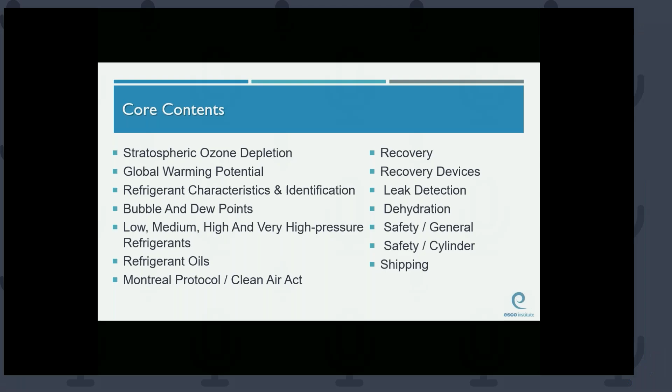We can see on screen here the different areas that are used to generate questions for the exam. We're going to try and touch on as many of these as possible. As I go through this, if questions arise, please submit them using the question feature and we'll try to address them at the end. As we go through the PowerPoint presentation, you'll see areas highlighted in red. These should be focal points of the presentation, where there are questions and or answers derived from this statement, concept, or fact. So pay particular attention to those.

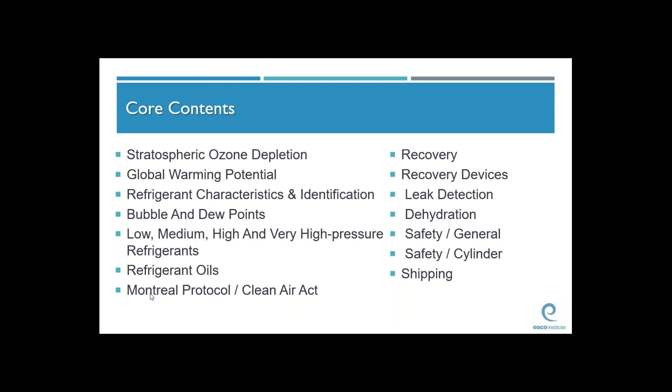We're going to get started with a brief description of the ozone. The ozone layer is what protects the Earth from the sun's harmful ultraviolet rays. The image shown here is from 2004, and it shows the hole, which is centered mostly over Antarctica.

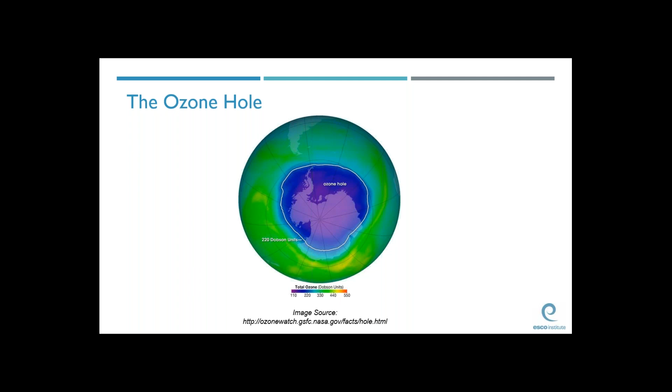The ozone layer is mainly located in the portion of the stratosphere, typically starting at about 7 miles up and extending to about 30 miles up. However, the height and thickness can vary seasonally and geographically.

Our biggest concern is the depletion of the ozone layer. Ozone depletion potential measures the ability of a substance to destroy stratospheric ozone. Scientific evidence points to chlorine in CFC and HCFC refrigerants as the primary cause of this depletion.

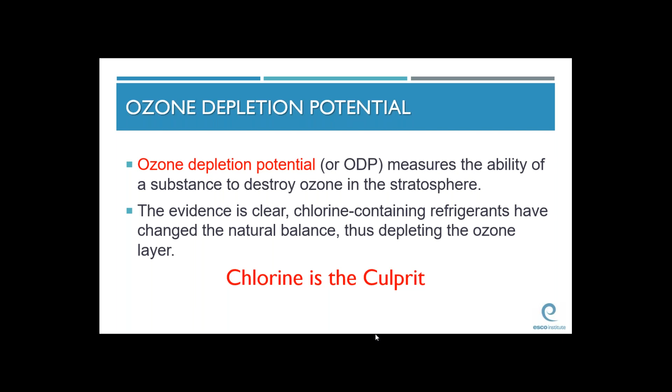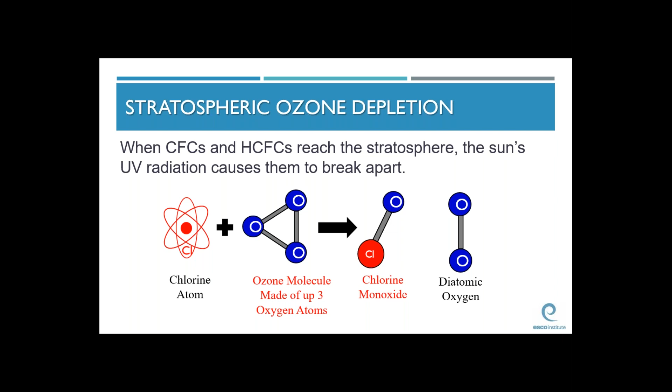The chlorine from CFCs and HCFCs will reach the stratosphere. It'll chemically react with an ozone molecule, which is O3, and break it down into chlorine monoxide and O2. Chlorine monoxide will release the oxygen atom and continue to attack other ozone molecules, breaking them down. Due to its average lifespan of 120 years, a single chlorine atom can destroy up to 100,000 ozone molecules.

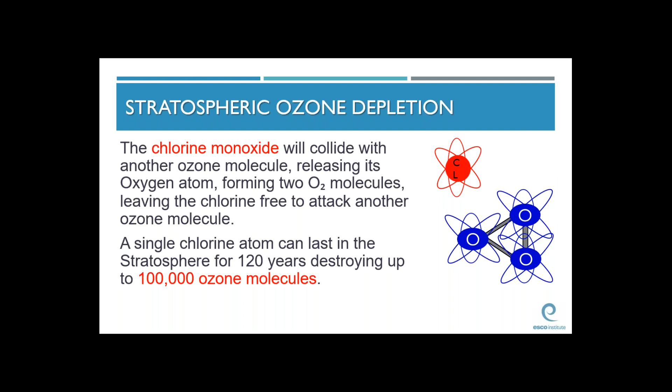So how do we know that it's chlorine from refrigerants and not naturally occurring chlorine that's destroying the ozone? Naturally occurring chlorine will dissolve in water and rain out of the atmosphere. Chlorine from CFCs and HCFCs will neither dissolve in water nor break down into compounds that dissolve in water.

As you can see, the slides highlighted in red there, so these are focal points for these particular slides.

Another environmental concern is the global warming potential, or GWP. GWP was established to compare the global warming impacts of different gases over a period of time. Carbon dioxide, which is CO2, has a GWP of 1 and is used as a baseline gas for these comparisons.

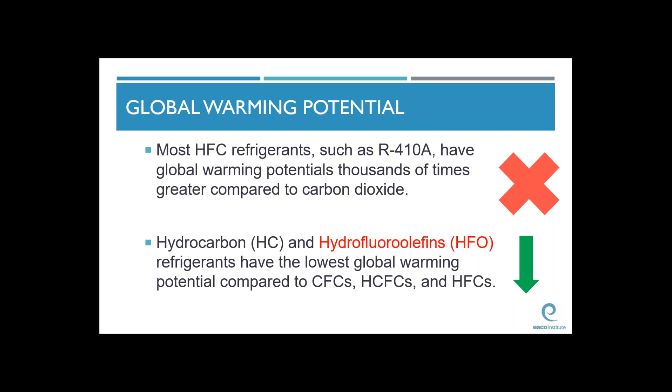Most HFCs currently in use have extremely high GWPs, in the thousands. Hydrocarbons and hydrofluoroolefins, or HFOs, currently have the lowest GWPs.

Refrigerant characteristics: ASHRAE Standard 34 groups refrigerants based on their flammability and their toxicity. Toxicity is represented by a letter, either A or B, and flammability is represented by a number, 1, 2, or 3. The 2 group has been divided into 2 more groups, the 2 and the 2L. The 2 has a low flammability, and 2Ls are slightly or mildly flammable.

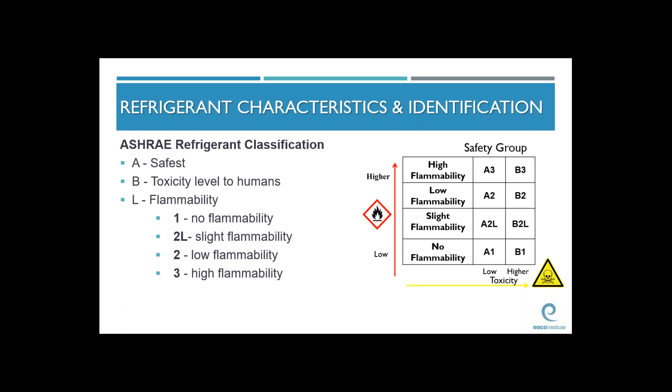We're going to briefly go over the different types of refrigerants and some of their characteristics. CFCs contain chlorine, fluorine, and carbon and have the highest ozone depletion potential of the refrigerants being used.

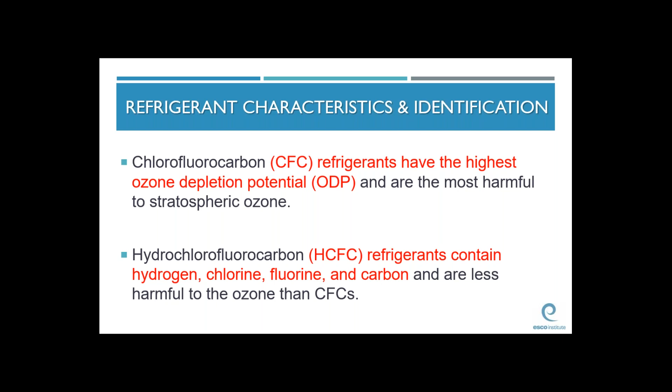HCFCs contain hydrogen, chlorine, fluorine, and carbon. They have less chlorine and more hydrogen than CFCs, but still contribute to ozone depletion.

HFCs contain hydrogen, fluorine, and carbon. They have an ozone depletion potential of 0. However, they typically have very high GWP, or global warming potential.

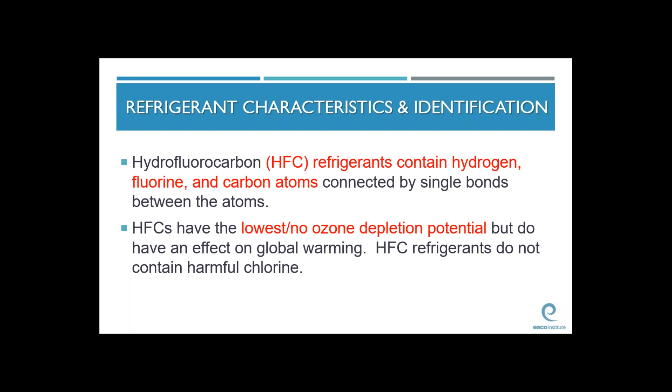Some examples of the refrigerants we just mentioned: CFCs are R11 and R12, HCFCs are R22 and R123, and HFCs are R134A, R410A, R404A, and R407C.

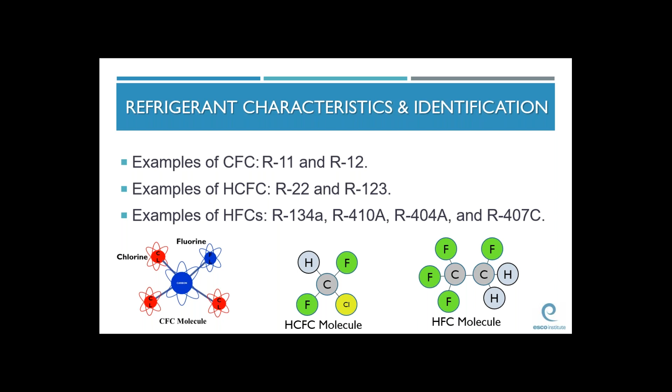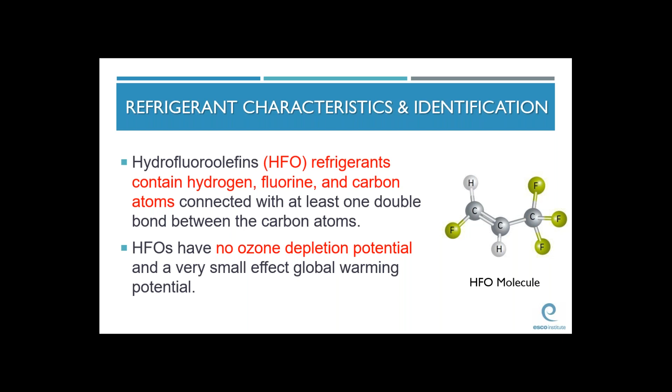HFOs contain, just like HFCs, hydrogen, fluorine, and carbon. However, HFOs have at least one double bond between carbon atoms, which makes them different from HFCs. They have a 0 ozone depletion potential and a very low global warming potential.

Most HFOs are mildly flammable and as such are classified as A2Ls. They contain fluorine, making them less flammable than hydrocarbons.

Currently, HFO 1234YF is being used in low-pressure chillers.

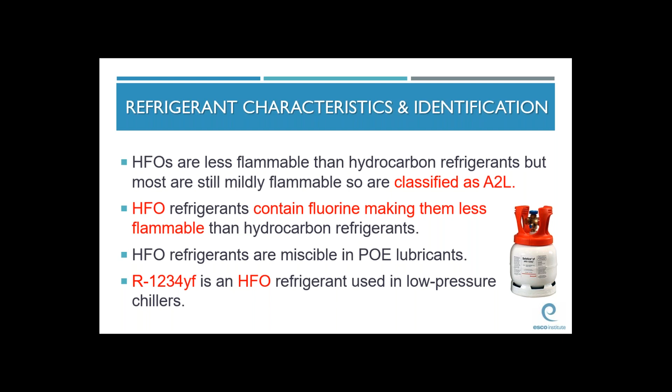Hydrocarbons contain hydrogen and carbon and are the least damaging of all refrigerants to the environment. They have an ozone depletion potential of 0 and a very low GWP, usually 10 or less.

Isobutane, which is R600A, and propane, which is R290, are examples of hydrocarbons currently in use in HVACR equipment. Now, as a point of emphasis here, the propane that's used as a refrigerant is not the same propane that's used for the grill. It contains impurities, so the propane that is used as refrigerant, R290, has been cleaned, filtered, and made refrigerant grade quality.

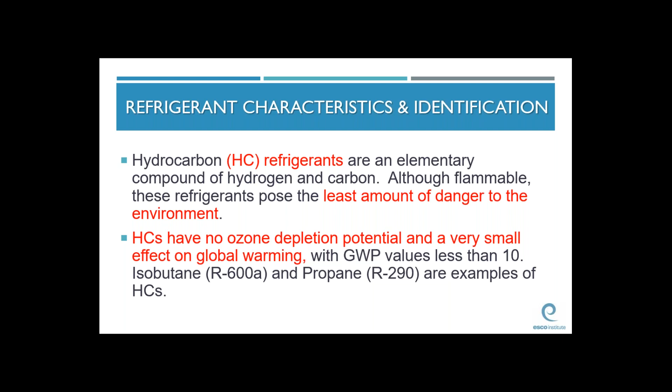Azeotropic refrigerant blends contain 2 or more refrigerants that, when blended together, create a new refrigerant that behaves like a single component refrigerant. They're numbered in the 500 series.

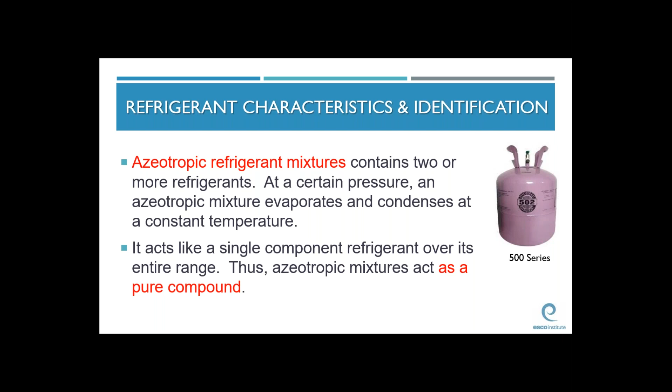Zeotropic and near azeotropic refrigerant blends contain 2 or more refrigerants that have different boiling and condensing points. If they're 2-part, they're labeled as binary; 3-part labeled as ternary. They're numbered in the 400 series.

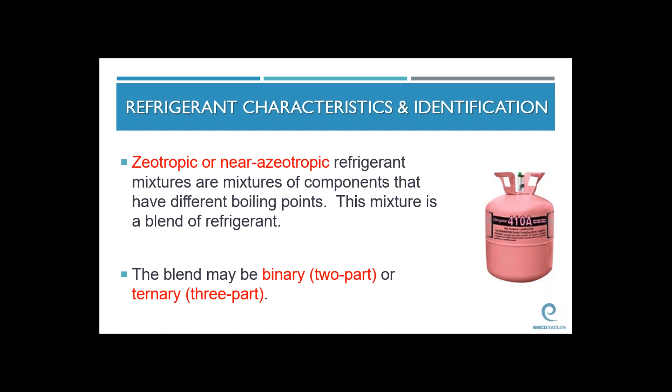Zeotropes and near azeotropes can fractionate, or separate into their original refrigerant components. This can cause their composition to change when leaks are present. Zeotropes and near azeotropic refrigerant mixtures should be charged as a liquid to avoid fractionation.

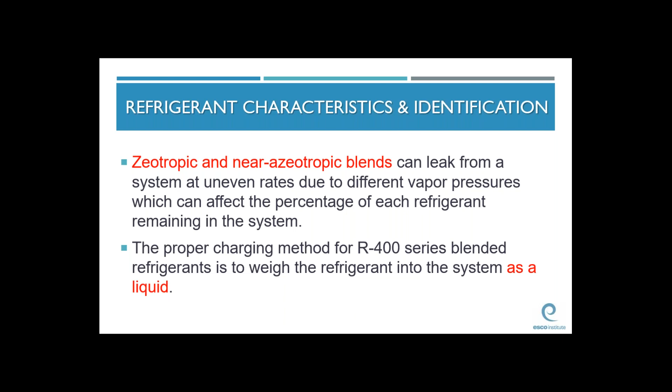Temperature glide is a term used to describe when a blend has a range of boiling or condensing points rather than a single boiling or condensing point. Temperature glide can range from a few tenths of a degree up to 12 degrees or more. For example, R410A has a temperature glide of 0.3 degrees.

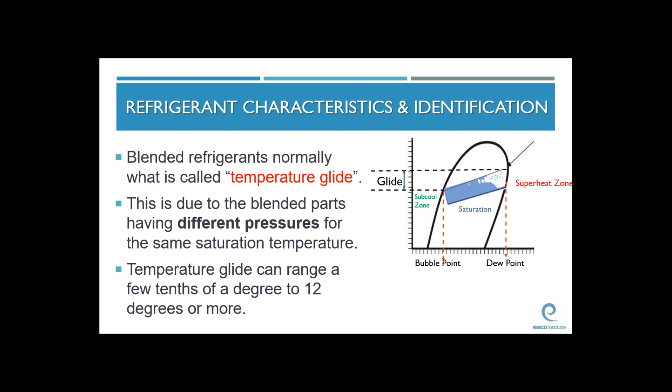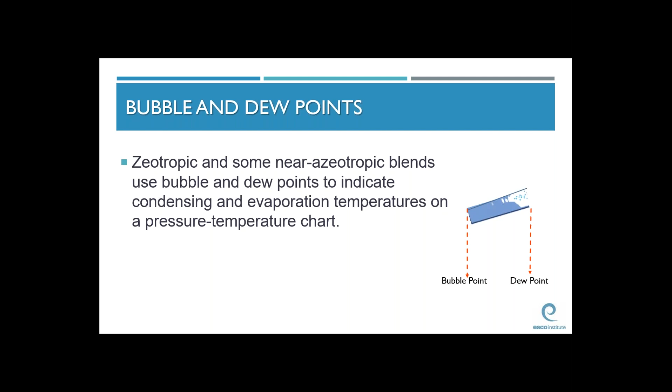Charging refrigerants that have temperature glide has been an issue for some technicians and students to grasp. Instead of using a single temperature pressure chart, we have to use what are called bubble and dew points. Charging blended refrigerants that can fractionate and have temperature glide is done using these points, the bubble and the dew point.

As an example, we have a temperature pressure chart that shows 2 columns under 407C. The liquid phase is used for charging with subcooling, the bubble point, and the vapor phase is used for superheating, or the dew point. Bubble point is used when charging by condenser subcooling. Dew point is used for charging with superheat.

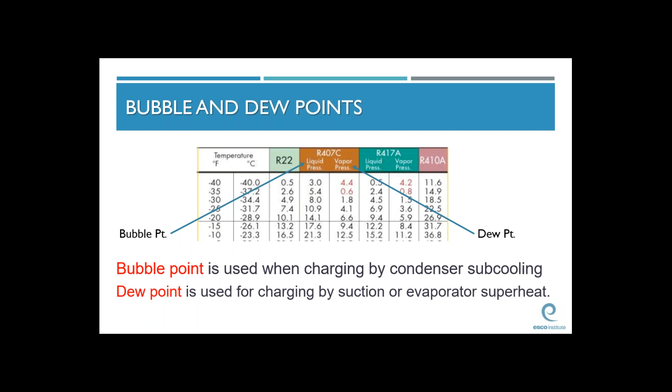For updated leak rate, service, and recovery levels, the EPA now uses 4 pressure ranges based on the refrigerant's liquid phase pressure at a condensing temperature of 104 degrees. These are the pressure classifications of the refrigerants. Previously, it used to just be low, high, and very high. They've added a medium class for refrigerants. So now we have low, medium, high, and very high pressure refrigerants.

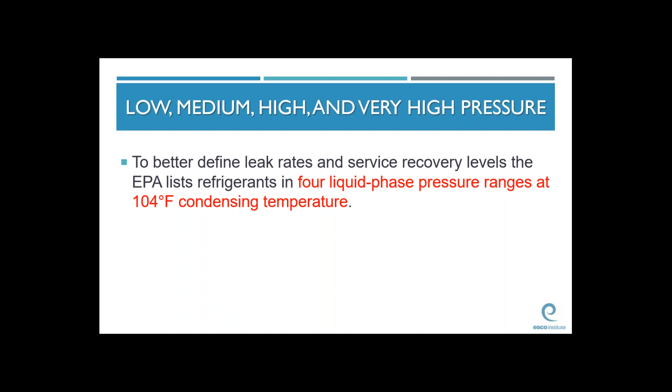As an example, low pressure refrigerants would be CFC 11, HCFC 123, and HFO 1233ZD. Medium pressure refrigerants would be CFC 12, HFC 134A, HC 600, and HFOs 1234YF and 1234ZE. High pressure refrigerants would be HCFC 22, HFC 404A, and HFC 410A. Very high pressure would be R744, which is CO2.

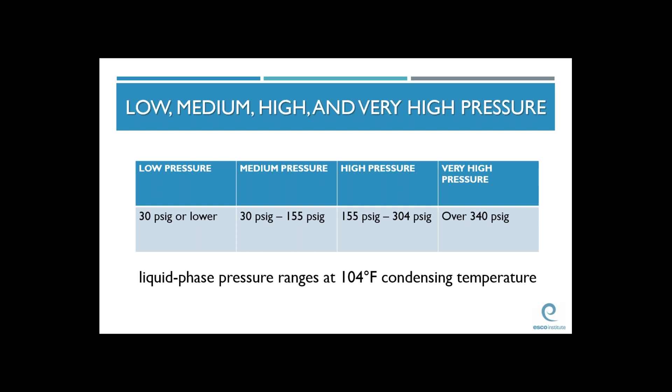We're going to move into refrigerant oils. HCFC blends use alkylbenzene oil, which is a synthetic oil. HFCs typically use polyolester or POE oil, which is also a synthetic oil. POE oils shouldn't be mixed with any other oils.

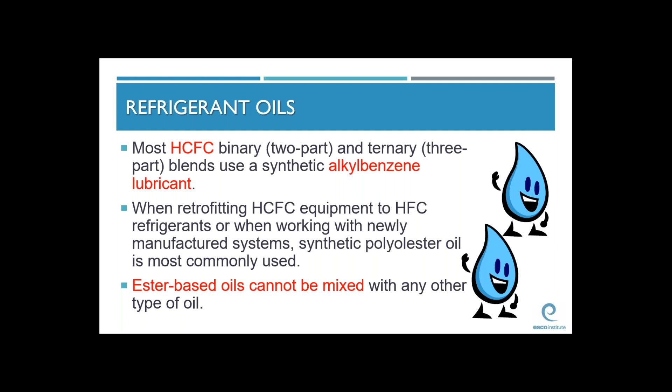When performing a retrofit from an HCFC to an HFC blend, most manufacturers will recommend that the oil be changed to the POE oil. It should also be noted that POE oil is hygroscopic, which means it readily absorbs moisture. So it should be limited to exposure to the atmosphere to 15 minutes or less.

We're now going to dive into the Montreal Protocol and the Clean Air Act and some of their regulations and requirements. The Montreal Protocol was a treaty signed by many nations that was meant to address ozone depleting substances, and the United States was a signatory to that.

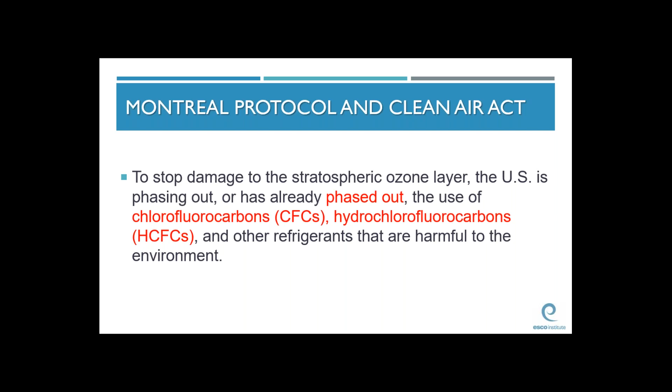To stop the stratospheric ozone depletion, the United States has phased out or is in the process of phasing out CFCs and HCFCs.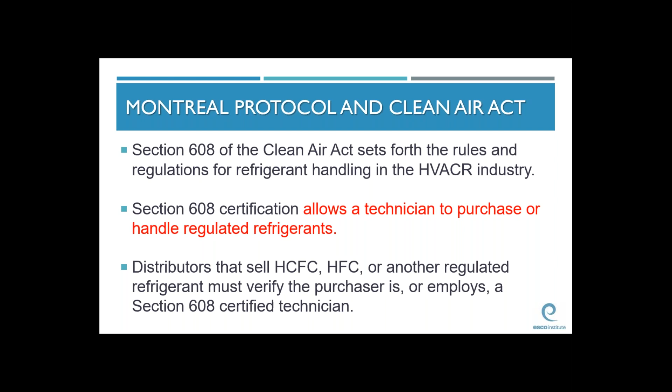It is Section 608 of the Clean Air Act that establishes regulations for the HVACR industry. It is a Section 608 certification that a technician is required to have to purchase these regulated refrigerants. Distributors that sell regulated refrigerants must verify that anyone purchasing the refrigerant employs or possesses a 608 certification.

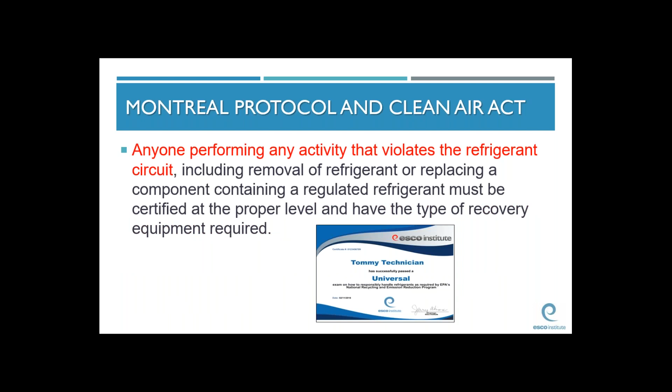Anyone performing an activity that violates the refrigerant circuit, meaning by accessing or opening the refrigerant circuit, is required to have a certification. A certification is not needed by persons that are servicing external components to the refrigerant circuit, such as electrical circuits.

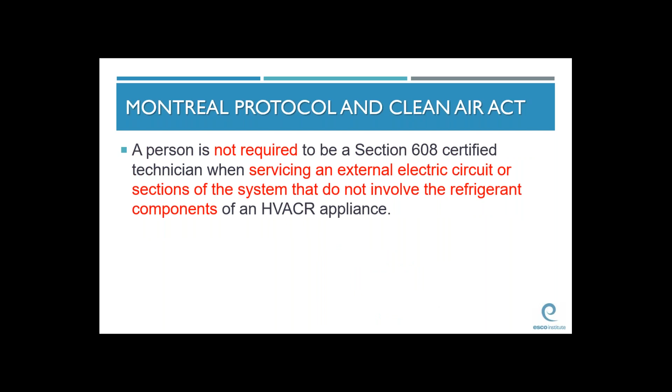Listed in the Clean Air Act are a set of refrigerants that are exempt from the prohibition on venting, such as ammonia, CO2, and some of the naturals like R290, which is propane, or isobutane 600A. Also, when a small amount of refrigerant is used as a trace gas for leak detection, it also is exempt from the prohibition on venting.

The EPA does not consider this a refrigerant when it is used as a trace gas, and by definition, it's a few ounces.

As of 2017, the fine stands at $44,539 per day per violation for a violation of the Clean Air Act.

If the EPA were to change regulations in the future after a technician were to become certified, it is the technician's responsibility to both learn and comply with any future changes.

State and local governments may pass laws that are stricter than what the Clean Air Act calls for.

In the United States, coming up in 2020, our HCFC-22 and HCFC-142B will be phased out. The rest of the HCFCs will be phased out in 2030. So supplies for those types of systems, the refrigerant in those systems, will come from recovery and reclamation efforts of technicians.

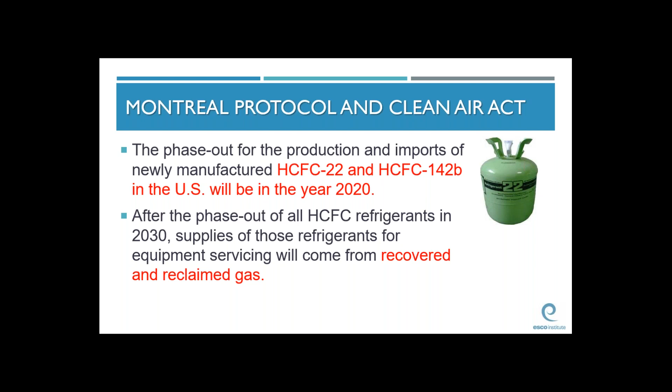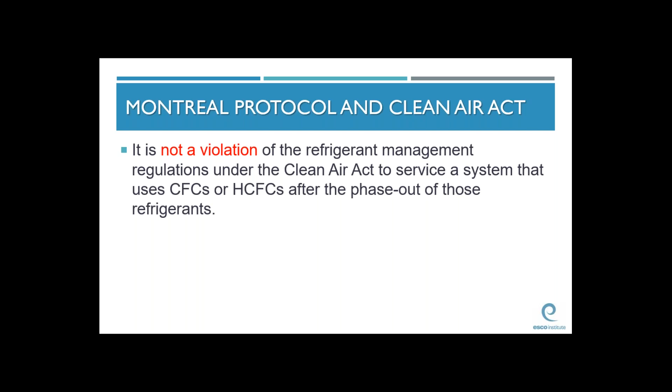It is not a violation to continue to service these systems. If a system runs on a refrigerant that has been phased out, as long as there's a supply of refrigerant in stock or a replacement refrigerant for that system, it is not a violation to service those systems.

Refrigerant that has been returned to be reclaimed must meet AHRI standard 700 for purity before it can be resold. A refrigerant that has been recovered but not reclaimed can only be charged into the system from which it came, or into a system with the same owner. Used refrigerant that does not meet AHRI standard 700 cannot change ownership without first being reclaimed.

Recovery machines that are used to recover regulated refrigerants must meet EPA standards. AHRI standard 740 is the standard for recovery equipment testing.

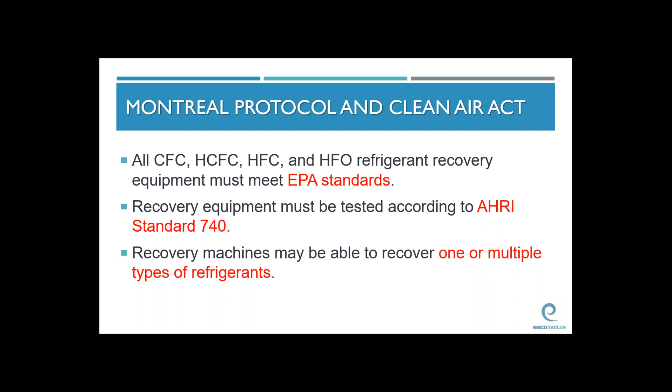There is no requirement that a recovery machine must be able to handle more than one refrigerant. It must only be able to handle one refrigerant. It can handle 1, 2, 3, 4, but there's no requirement that it can handle more than one.

Sealed systems, package systems that do not have service valves, must be equipped with some sort of process stub or service aperture that's used to access the system using a piercing type valve. These piercing valves are temporary and should be removed and replaced with a permanent valve when any repairs are completed.

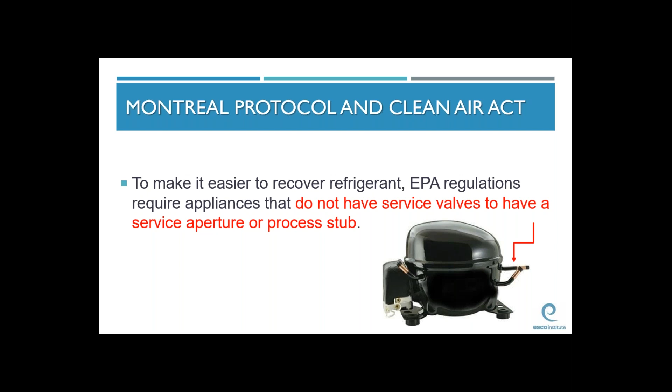When disposing of appliances with 5 to 50 pounds, the EPA does not require the technician to record the model and serial number. However, records must be kept indicating the type of refrigerant recovered, the quantity of refrigerant by type, the quantity recovered from appliances that were disposed of in each calendar month, and the quantity of refrigerant by type sent for reclamation and/or destruction.

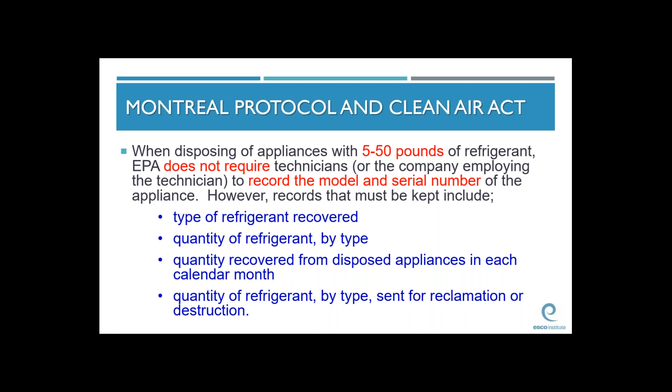It's the EPA that can exempt refrigerants from venting, not companies or technicians. They will determine which refrigerants don't have an environmental threat and list them under the exempt section of Section 608. Some of these exempt refrigerants are your natural CO2, and some hydrocarbons such as R-290 and R-600A.

It is still lawful to service existing R-22 systems using the existing supplies of R-22. It is not legal to top off R-22 with another refrigerant, such as 410A or any of the EPA-approved replacements for R-22. Topping off a refrigerant will cause mixed refrigerants, which may be impossible to reclaim and may cause damage to the system.

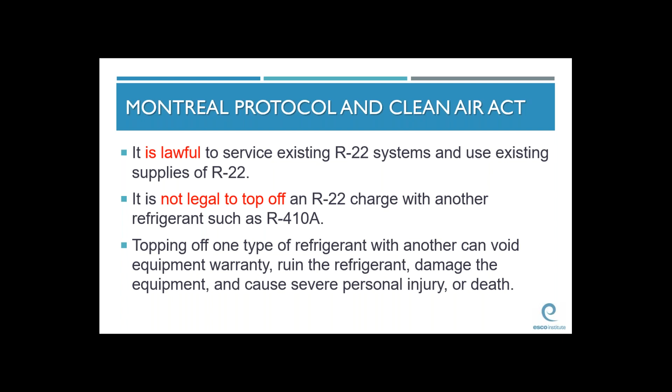Refrigerant cylinders are disposable cylinders. Before they are disposed of, the pressure should be reduced to 0 by recovering the refrigerant and then rendering the cylinder useless. There's a little knockout that's punched out, and typically AHRI recommends that you write empty on the cylinder. The metal should be recycled when applicable.

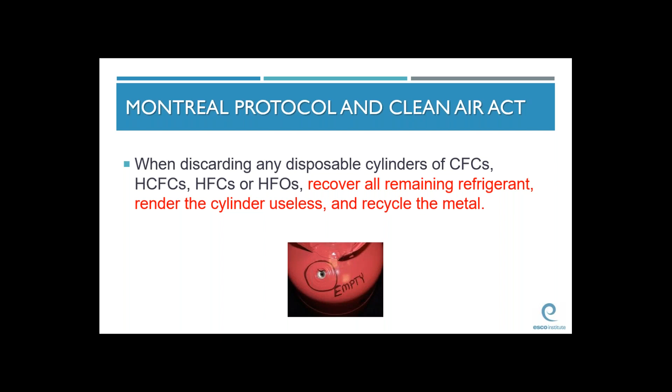It is the final person in the disposal chain that is responsible for ensuring that any regulated refrigerant has been removed from appliances before they are disposed of.

A violation of the Clean Air Act would consist of a knowing release of any regulated refrigerant during the service, maintenance, repair, or disposal of appliances. Added to that, we add vandalism and theft. Cutting the lines when the unit is stolen is a violation of the Clean Air Act.

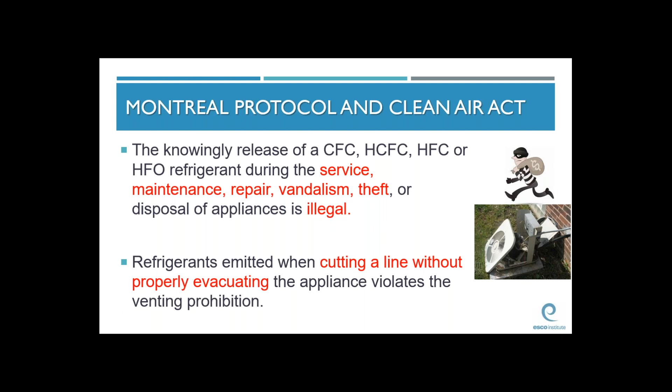Refrigerants emitted when cutting a line without first recovering the refrigerant is a violation of the Clean Air Act, so the refrigerant must be recovered first. Venting refrigerant from a recovery cylinder or recovery machine is also a violation. Records of recovered refrigerants must be kept to ensure that venting does not take place after recovery.

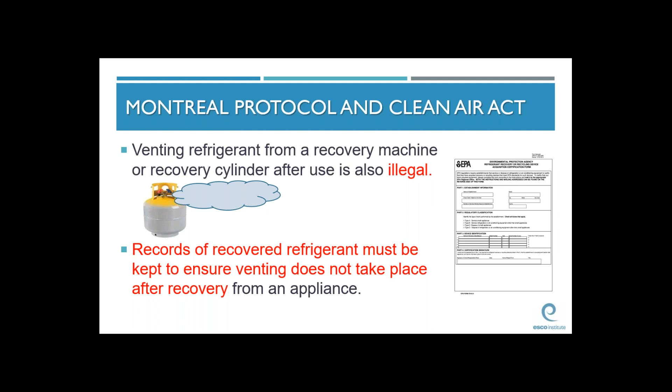As we said earlier, isobutane and propane are currently in use in many systems. They're used in household refrigerators and freezers. This refrigerant is exempt and can be vented. However, adding nitrogen to a fully charged system that uses a regulated refrigerant for the purpose of leak checking would be considered a violation of the prohibition on venting.

We said earlier that a trace gas can be added to a system charged with nitrogen for the purposes of leak testing. A trace gas is only a few ounces of refrigerant, and that would typically be the refrigerant used in the system to prevent any contamination, cross-contamination, or mixing of refrigerants.

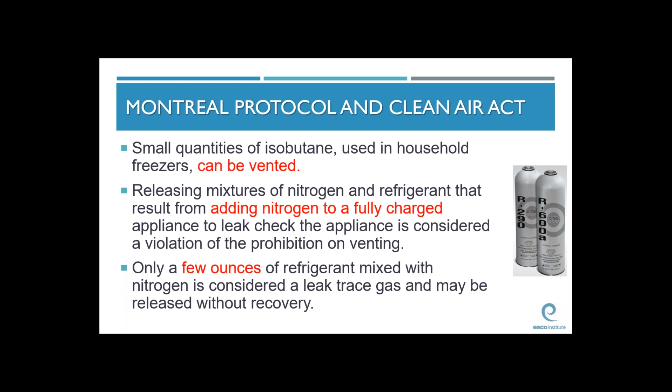We're going to go over the 3 R's. Recovery means to remove the refrigerant in whatever condition it is from the system and simply store it in a container. No further testing or anything is done.

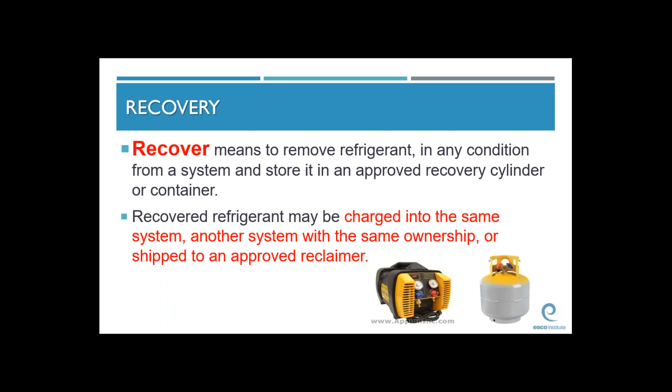So the term recover means to remove the refrigerant from a system and store it into a tank. Remember that recovered refrigerant can only be charged back into the system from which it came or into a system with the same owner. If the refrigerant is not to be reused, it can be brought in to be either recycled or reclaimed, the other two R's.

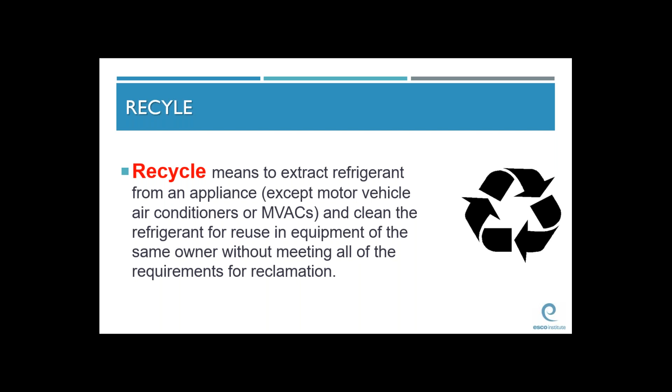Recycle means to take the refrigerant and pass it through a recycling machine, which is a series of filter dryers and possibly some distillation, but it extracts some of the air and impurities from the refrigerant. Now, it does not mean that the refrigerant has been brought back to AHRI 700 purity. Recycled refrigerant, just like recovered refrigerant, can only be used in the system from which it came or into a system with the same owner.

Reclaiming is done at one of the facilities. It's when we bring the refrigerant tank in to a drop-off or collection point, and it's sent to be filtered, distilled, everything brought back to AHRI 700 standards to be sold as new refrigerant. There is a chemical analysis performed on the refrigerant to ensure its purity. So the 3 R's: recover, recycle, reclaim.

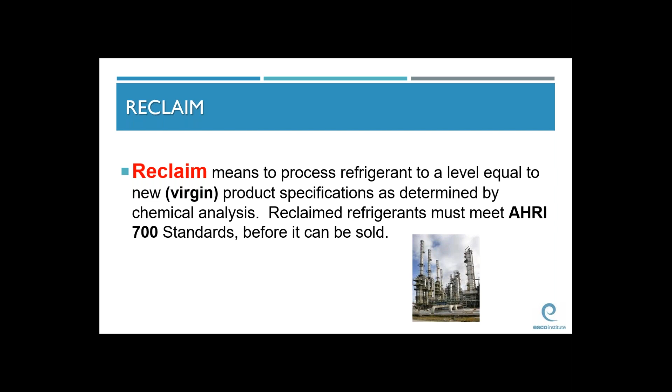The two types of recovery processes we're going to discuss: system dependent or passive recovery, which is a non-pressurized container, and it captures refrigerant with the assistance of the compressor in the system or the pressure differential between the container and the system itself. It typically is not capable of capturing all of the refrigerant in the system.

A self-contained or active recovery system is the standard recovery machine that has a compressor. It's capable of pulling all the refrigerant out of the system without any assistance from the system itself. So we have system dependent or passive, which is again an empty vessel, or a self-contained or active recovery machine, which is a machine that can draw out all the refrigerant on its own.

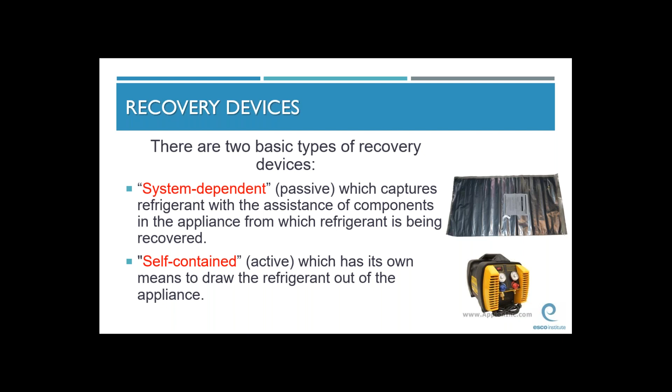Remember, it's important that we do not mix refrigerants. So when performing recovery, we don't put multiple refrigerants into a recovery tank. You can take R22 from one owner, R22 from another owner, mix them—it's the same refrigerant. You cannot take R22 from one system and R410 from another system and put them into the same tank.

This mixture may be impossible to reclaim, and in most cases has to be destroyed, which is a very expensive process. It also depletes future supplies of these refrigerants. Future supplies of R22 will come from the recovery and reclamation efforts of technicians in the field. If the R22 is mixed with alternative replacement refrigerants or 410A, the mixture may be impossible to reclaim, and that R22 will not be put back into the supply chain.

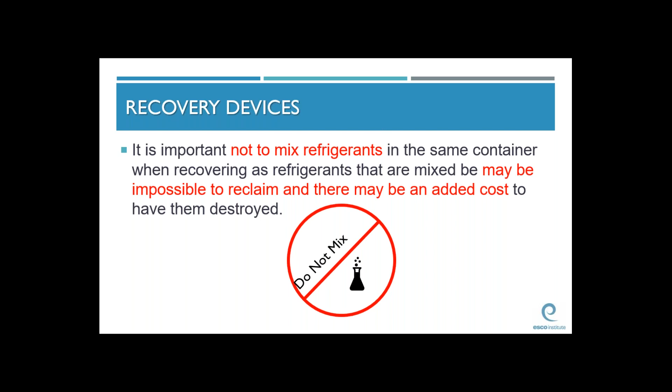If we're dealing with a small leak, we can use an electronic or an ultrasonic leak detector. Remember to verify if the refrigerant is an HFC or an HFO, that the leak detector is capable of detecting those types of refrigerants. Older models used to pick up on the chlorine that was in the refrigerant, and these newer refrigerants do not have chlorine. So make sure that an electronic or ultrasonic leak detector is capable of picking up the refrigerant that is in the system.

Another leak detection method is a standing pressure test using dry nitrogen. The system should be pressurized with dry nitrogen to the pressure listed on the data plate, and a trace gas can be used if the leak can't be found. We can use the electronic leak detector to pick up that trace gas.

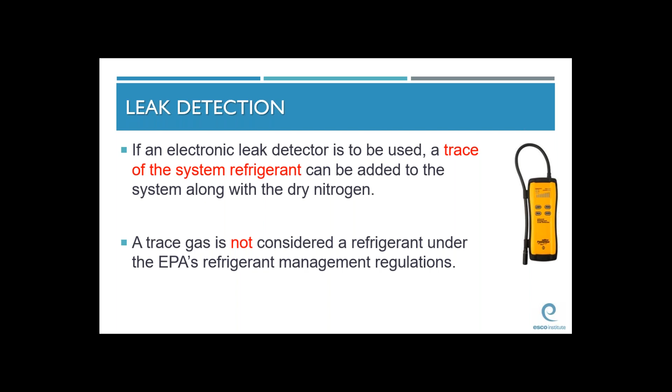Remember, a trace gas is not considered a refrigerant by EPA, so it doesn't constitute a violation of the Clean Air Act. It's just a few ounces added to a system that is charged with nitrogen for the purpose of leak detection. Remember that a trace gas should match the charge that's in the system already. So if it's an R410 system, we would use R410 as the trace gas.

After we found the leak and the leak has been repaired, a new filter dryer should be installed and a standing pressure test done. Again, the maximum system pressure is going to vary from one system to the next depending on the manufacturer's recommendation. Once the leak test has been performed, we can evacuate.

For systems that contain flammable refrigerants—A2Ls or A3s, hydrocarbons, and HFOs—the leak test should be done before evacuating to 500 microns or lower. If there is a leak and we pull a vacuum into a system that uses a flammable refrigerant, we will pull air into that system.

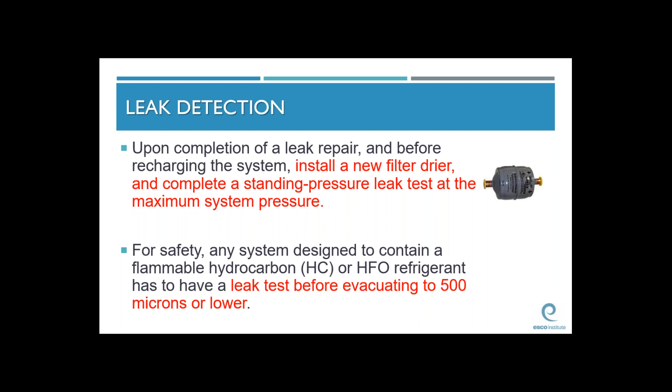HFO refrigerants do not contain odorants like natural gas, and odorants do not need to be added to these systems.

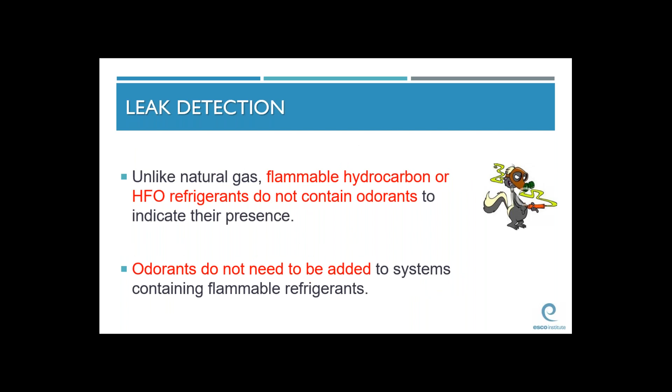Dehydration, also known as vacuuming a system. The reason for dehydrating a system is to remove water and water vapor, that's it. If moisture is allowed to remain in an operating refrigeration system, it can form hydrochloric or hydrofluoric acids.

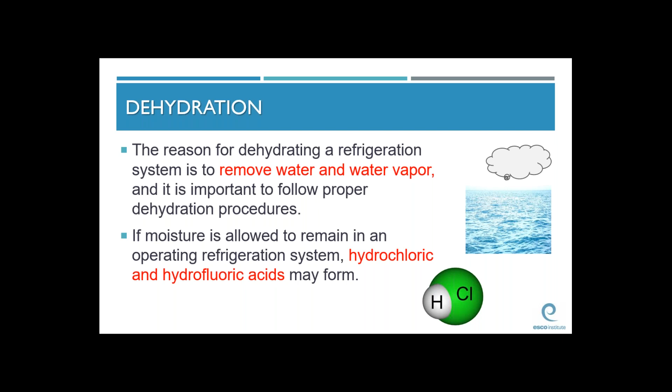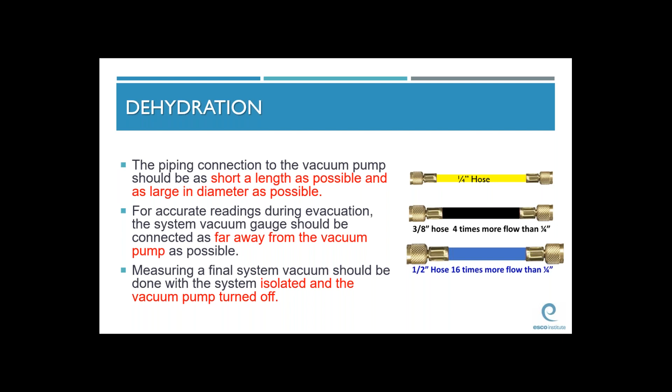We're going to cover some general service procedures and safety procedures that should be observed when working on any system, whether it be a type 1, type 2, or type 3.

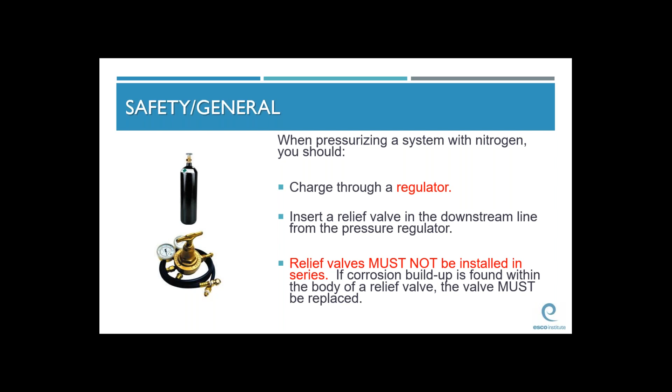When we're pressurizing a system for the purpose of leak detection, we should never use oxygen and or compressed air. Again, an inert gas like dry nitrogen should be used. Oil combined with oxygen under the heat of compression can cause an explosion. There's a chemical reaction that happens that causes the pressure to rise rapidly and the system may explode.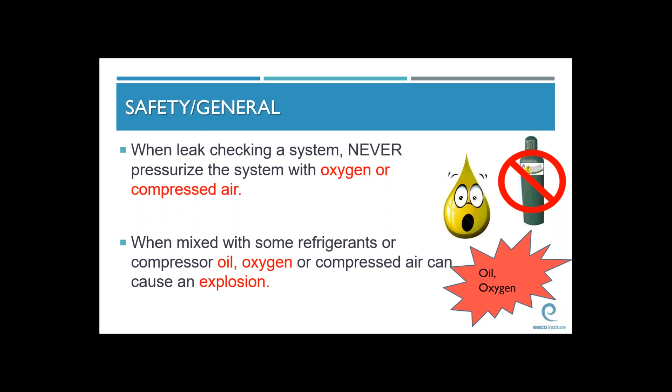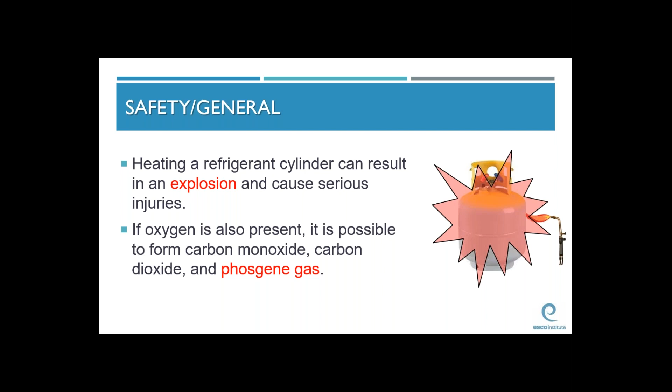If the refrigerant in the system contained chlorine, it's possible for hydrochloric acid to form. If the refrigerant in the system had fluorine, hydrofluoric acid may be formed.

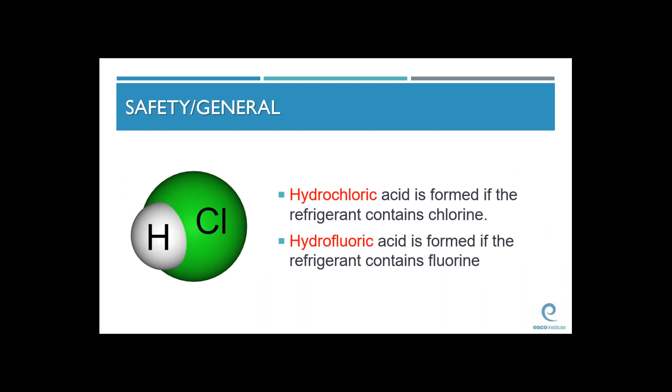When working with any material, any refrigerant, any oil, the safety data sheet should be reviewed by the technician for safety standards, compatibility with other materials, things like that. Some of the new HFO refrigerants are not compatible with the silicone or elastomer seals that are used in some of the systems, the seals and gaskets. So when a retrofit is performed and the system is converted to an HFO refrigerant, some of the gaskets and seals used throughout the system may have to be changed. That material could be found in the safety data sheets.

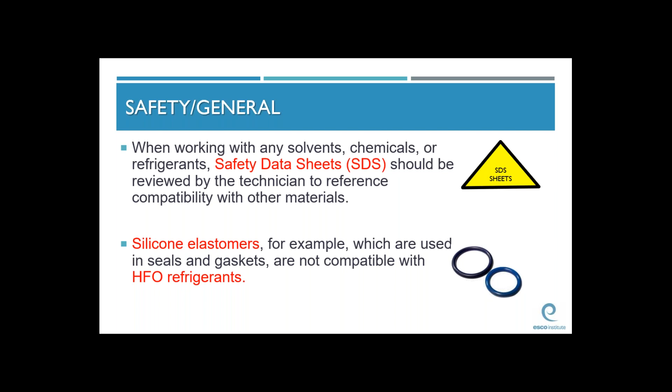Inhaling refrigerant vapors can cause heart irregularities or even unconsciousness. They should be used in a well-ventilated area. Refrigerant is heavier than air and can cause oxygen deprivation, which is suffocation. The safest refrigerants would be designated A1, but even A1s can cause suffocation.

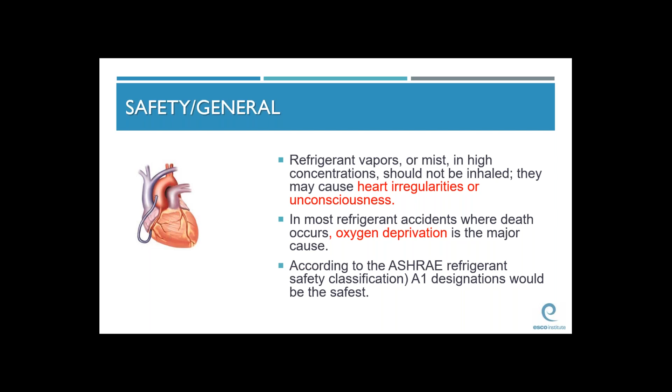Something newer: when we're using a flammable refrigerant, an A2, A2L, or A3, the process stub and tubing must have a red color marking. Areas of the process stub that are color-coded red, this red coloring must extend 1 inch in each direction from an area where a piercing valve may be used. So in systems using A2, A2L, A3 refrigerants, we'll notice red tubing.

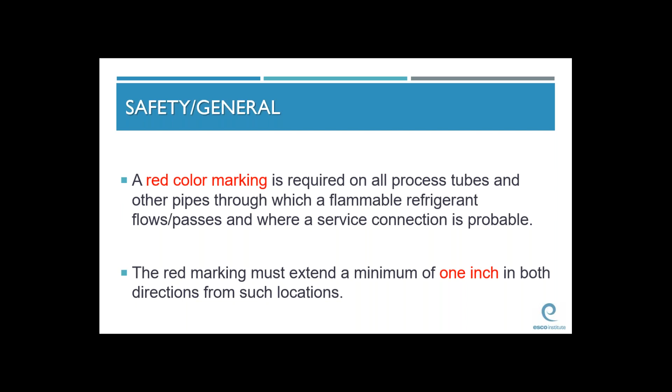A recovery cylinder should never be filled to more than 80% of its capacity by weight. Care must be used to prevent overfilling. So we should use a scale or a thermistor, some kind of method used to shut the system down when we reach 80% capacity of the recovery tank.

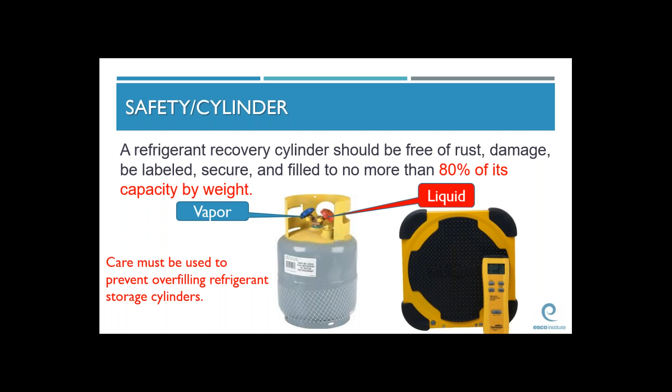These tanks must be hydrostatically tested every 5 years. This is typically done by the reclaimer when they receive the tank, and they'll stamp into the side the date it was tested, and we have 5 years from that date.

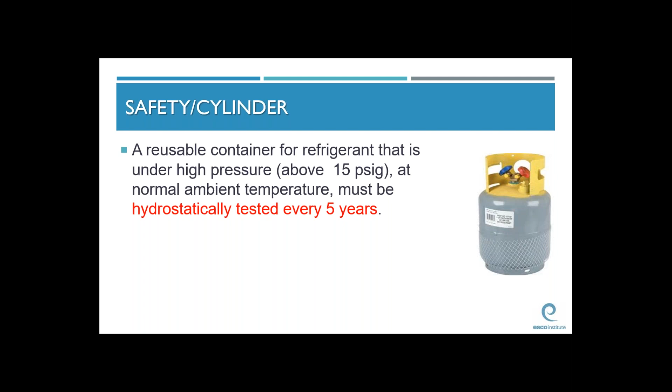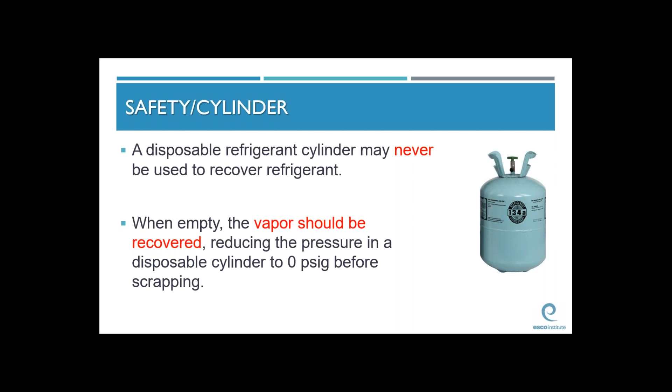For people involved in the shipping of refrigerants, each refrigerant cylinder should have a label or a tag to identify the type of refrigerant in the tank. This also allows a technician's company to determine the amount of refrigerant recovered for record-keeping purposes. Remember, we discussed earlier the requirements for technicians or companies with systems from 5 to 50 pounds, and what they're required to keep records of.